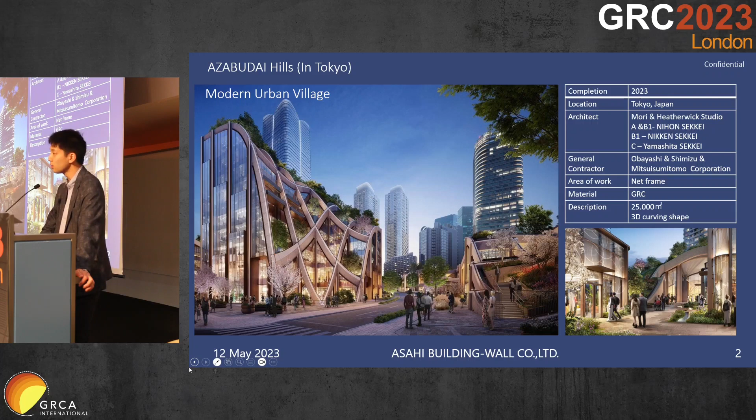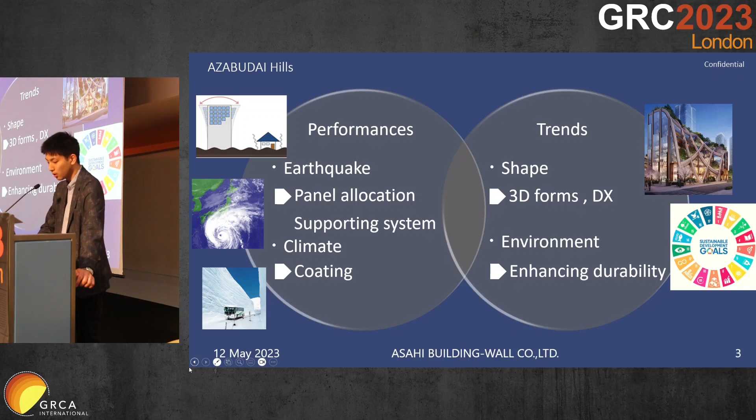A three-dimensional net frame GRC structure is adapted to seamlessly blend the water features and greenery. Work began in 2021, and we are now in the final phase of the project. Japan has harsh climate conditions because Japan is an archipelago. Summers are hot and humid, and there are typhoons. Winters are cold and dry, and there are also regions with heavy snowfall. I will proceed to introduce the Azabudai Hills project with a focus on how the engineering caters to Japan's environmental constraints and design requirements.

Firstly, in regard to earthquakes, we usually use the rock and sway method to deal with story displacement. For the Azabu project, we avoided allocating panels that would straddle different structures and affixed all of them on the same structure. This is so we don't have to consider story displacement. The damper for the steel structure was projected to move as much as 60 mm in earthquakes. The placement was such that we could absorb the 60 mm with the seams in between GRC panels.

In doing so, we no longer needed to replace damaged parts on the damper after earthquakes. We merely needed to replace the sealant. Further, the steel structure was finished on 4 sides with GRC, and the right picture shows this. At the bottom, the pillar panel is not accessible. We adopted a method of installation that didn't need fasteners. The panels were affixed only at the top, and heat expansion and contraction would be absorbed along the length of the panel.

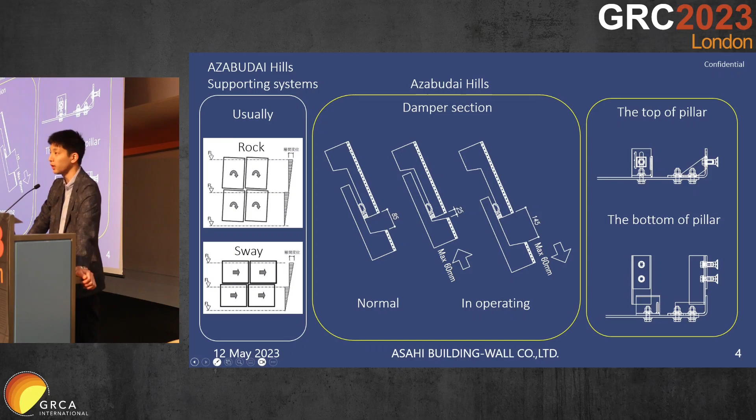In regard to the climate conditions, almost all buildings in Japan have to have some kind of extra finish. The same applies here. Due to the special finish, we conducted a specialized test for this purpose. We performed neutralization, infrared, heat cool cycle, and other accelerated testing on 10 types of coatings, and assessed the deterioration of the exterior, waterproofing, the surface strength, the tightness, and anti-wear durability. We chose the best materials based on the testing results. The complexity and the number of materials defined our coating test for this project, but typically, we do routinely conduct simpler testing for finishes.

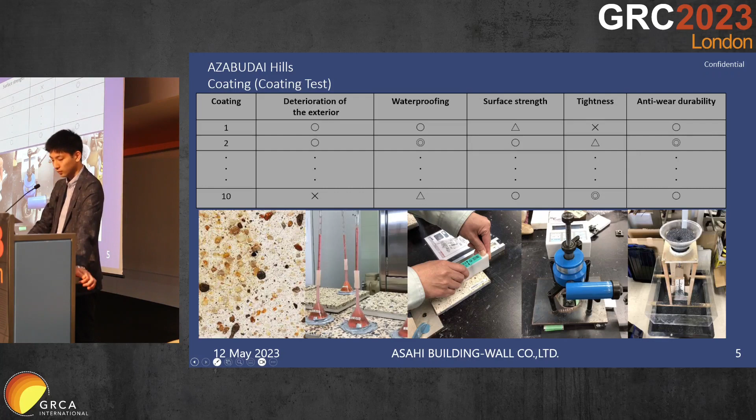In regard to the shapes, the shapes were free-form, utilizing the flexible properties of GRC to the maximum extent. This is only an excerpt. Besides this, we have cross shapes, T-shapes, and M-shaped structures to deal with. We automated as much of the work processes as possible due to the complexity and the number of different shapes. Such free-form structures are increasingly common even outside of major cities, accelerating the automation and digital transformation of GRC design and production.

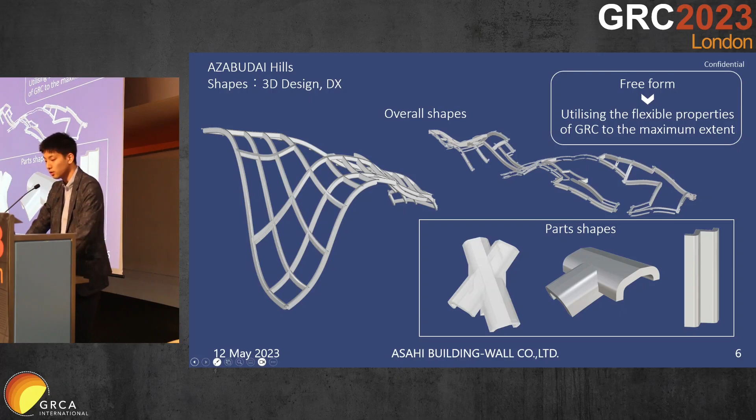This is a unique finish using natural aggregate stones. The design envisioned a massive net springing up from beneath the ground. We used various stones to achieve that effect. In order to realize this finish, we made many samples indeed. This is an example, but we made samples with a high proportion of aggregate, low proportion of aggregate, white cement, Portland cement, and many other combinations. We extensively deliberated on this from the early design stage.

The GRC was composed of two layers, the aggregate layer and GRC layer, to fulfill both structural and design elements. We strove to recreate the approved sample, and through the whole production process, we visually examined the color and density of the aggregate, amongst other things, for 25,000 square meters of the products delivered. In the final result, we managed to fulfill strength and design requirements while creating a durable product.

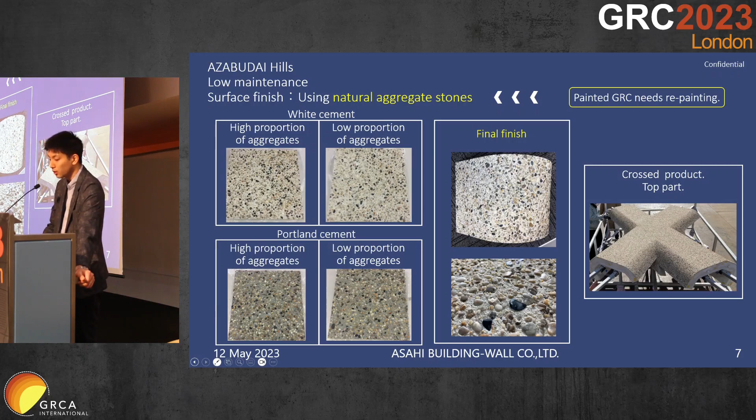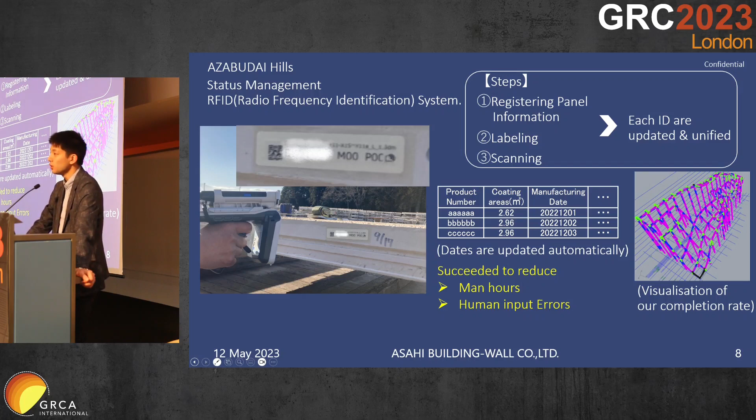The project is ongoing. As such, we still don't have the full view of the structure. The facility is expected to open in autumn of 2023. Kindly do visit if you come to Japan.

There are many ways to use GRC. In Japan, we have opted to blend GRC with other materials to achieve a more durable product. We approach the technical underpinnings from many perspectives to ascertain the safety of the product. If you encounter difficult technical challenges, please let us share the opportunity to take on the challenges together.